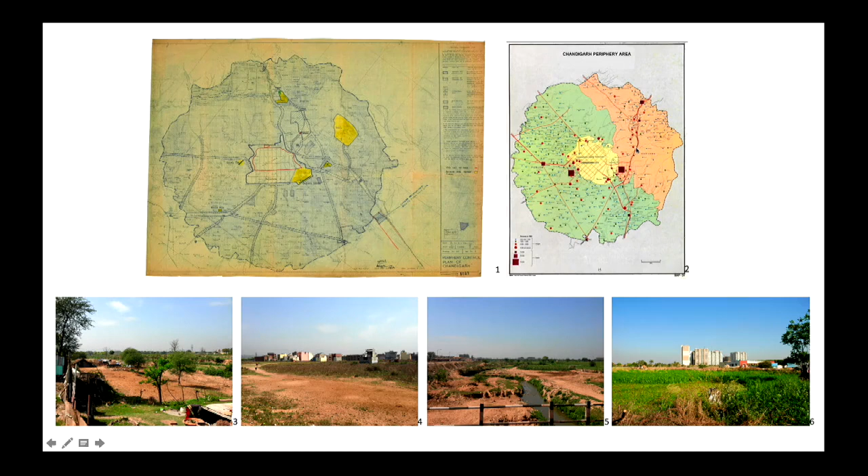After 66, this idea was difficult to maintain because of the partition in two states. You have Punjab on one side and Haryana on the other side. So today, many of those greenbelt areas are built up.

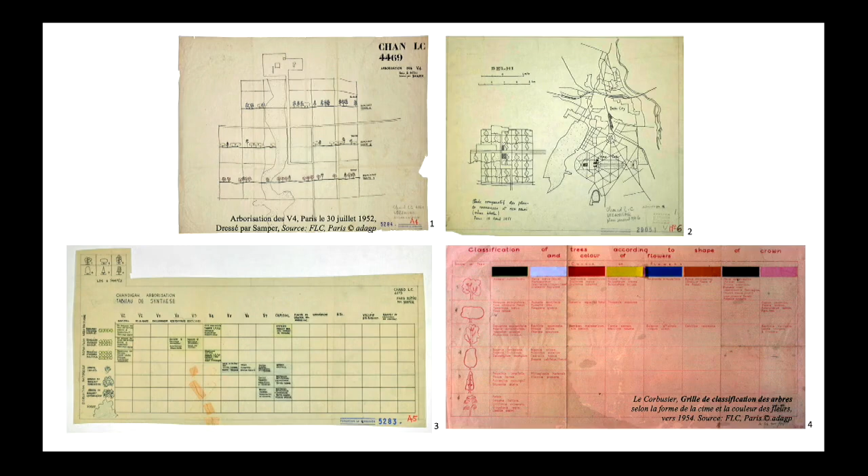Okay, so you saw the New Delhi plan by Lutyens, and in Chandigarh you see also the monumentality of the Lutyens plan. In respect to that, the project of Chandigarh is a more modest project, a very serious project on the way of planting the city. You have this kind of systematic grid of planting, which was in the last slide.

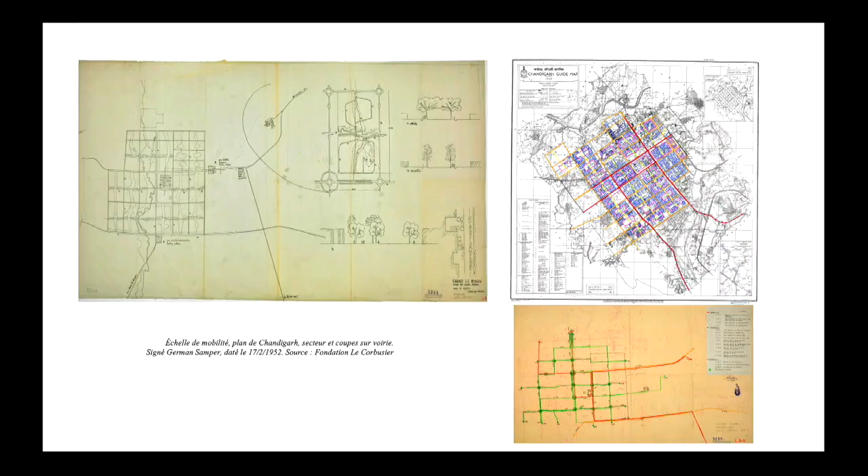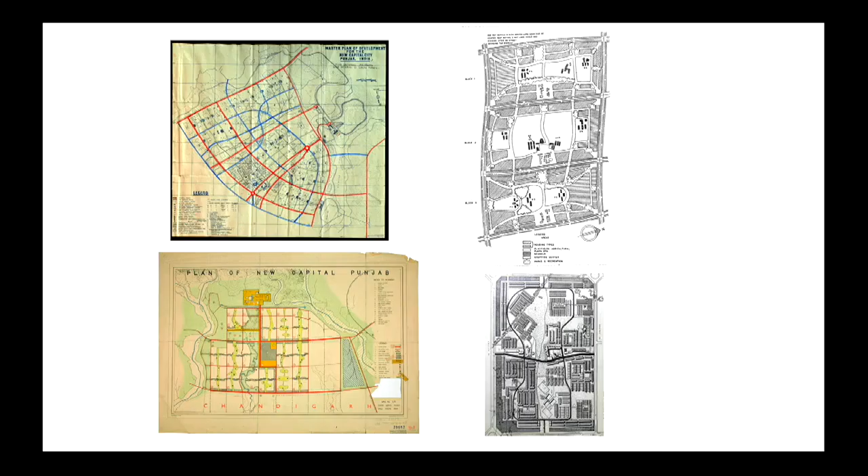Donc les vertus de la grille, on les passe, il y en a beaucoup. L'idée du village, et comment l'idée... Je voudrais revenir quand même sur celle où il y avait... celle où il y a la ligne avec les villages, le dessin de Jeanneret, etc. Ben je ne sais plus où elle est, sincèrement.

Ce qu'il faut savoir, c'est que ce qu'on peut observer n'est pas secret. Il suffit d'aller aux archives de la Fondation Le Corbusier, de lire les notes pour comprendre ce qui a pu se passer entre Le Corbusier et Jeanneret. Il y a eu des moments d'affrontement, des controverses très violentes entre Le Corbusier et Jeanneret. Une grande controverse au sujet de laquelle Le Corbusier sera toujours aigri concerne le dessin et la conception du secteur, ce fameux secteur 22 que vous avez pu visiter, qui est le secteur dit prototype et un peu canonique. Le résultat est surtout de Fry et Jeanneret, avec Drew aussi qui contribue à ce dessin.

Mais ce qu'il faut savoir, c'est juste ce petit dessin que vous pouvez voir, le secteur numéro 5. Il faut savoir que Le Corbusier déteste celui-ci, le 5. Et le 4, par contre, c'est l'esquisse qu'on a pu retrouver sur papier en tête de Jeanneret au Canada, et qui montre quel aurait pu être le projet d'un secteur tel que l'aurait souhaité Le Corbusier, c'est-à-dire un secteur composé à partir d'une somme d'unités d'habitation horizontale. Là on voit bien la façon dont Le Corbusier voyait la ville.

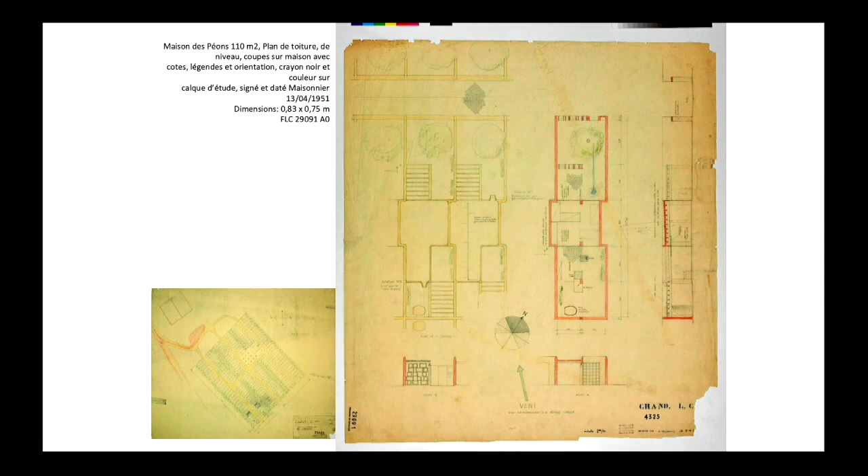Also to have all this policy on planting and knowledge - I think that's an important item. You didn't show it, but there are images on climate and how to build in a way adapted to the climate - that's an important item too. Also the building materials, brick - I imagine brick is something available in Chandigarh and around it. If you put together all those elements, that could be a smart recommendation for the government of Chandigarh. Maybe we should pay more attention to those issues in our work with the students on what we will show them. We will go to Delhi for a meeting at the end of the semester, so your presentation widens our perspective, I would say.

What do you think? Yeah?

So, urban village and climate. Just a few words, Thierry.

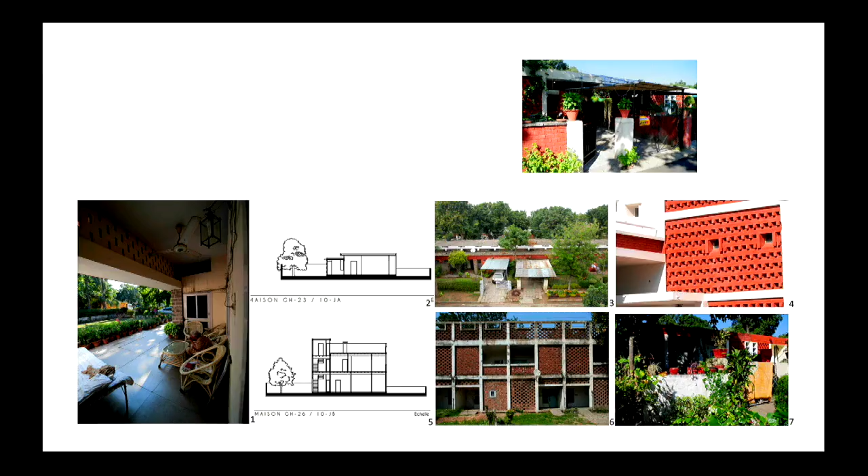Et donc là, c'est la deuxième controverse qui va opposer Le Corbusier à Jeanneret. Jeanneret, lui, vivant en Inde, expérimente les conditions climatiques parfois extrêmes et réalise que ce qui est proposé par Le Corbusier et Maisonnier n'est pas applicable.

Donc une des grandes controverses, c'est par exemple la question de la hauteur pour Le Corbusier. Si je me souviens bien du Modulor, c'est 2,26 m de haut. Donc Le Corbusier prévoit sa maison des péons à 2,26 m. Et Jeanneret lui renvoie des courriers, il lui dit: mais nous, tout ce qu'on voit, les maisons les plus agréables sont celles qui ont des grandes hauteurs de plafond, qui permettent à la chaleur de monter, etc. Et donc au bout d'un moment, le conflit est tel que Jeanneret pose sur son bureau les documents de la grille climatique et ne les ouvrira plus. Voilà, donc ça fait un deuxième drame.

So, for example, about climate, there was a second fight between Le Corbusier, who was in Paris, and Jeanneret, who lived there. Le Corbusier, of course, wanted a ceiling at 2.26 m, which doesn't work in the climate of Chandigarh or in many Indian cities. For Jeanneret, the ceiling has to be much higher, so as to have a buffer zone for the hot air to be evacuated. So this was a second fight they had.

Okay, last question. Yes, I have a question about how the city has evolved through time. Does it stay the same, or was it densified?

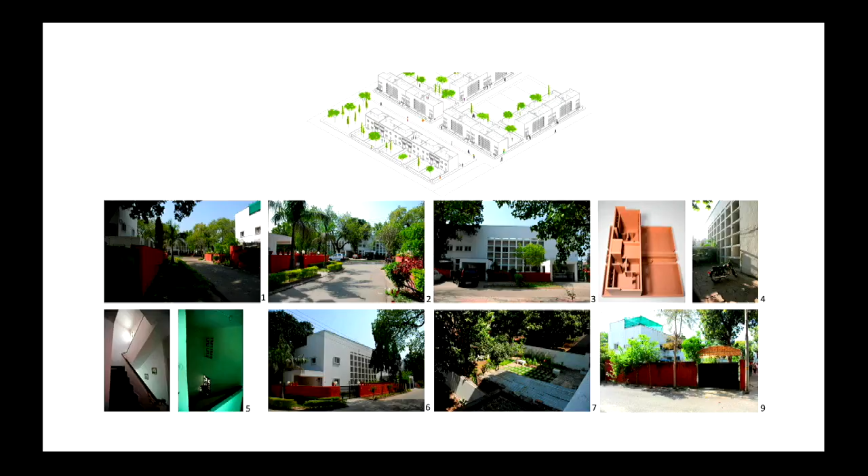Je le montre, alors il faut le trouver. Donc oui, en fait, c'était avant. Encore? Oui. Tu m'arrêtes, hein, je sais plus où c'est. Ah voilà, et alors, ouais. On peut laisser sur 45 par exemple. Yes, okay, sur Burail?

Donc ce qui est intéressant dans tout urbanisme de grille, c'est de voir comment la grille est un support d'urbanisation successive. Une des critiques qu'on peut formuler à Chandigarh, c'est que Chandigarh est géographiquement organisé socialement. Les quartiers les plus chics, les plus riches, ceux destinés aux avocats, aux grands administrateurs, ceux qui sont proches du Capitole, sont des îlots très peu denses, extrêmement verts, plantés. On a l'impression d'être je sais pas où, à Los Angeles, dans les plus beaux quartiers, etc. Et au fur et à mesure qu'on descend dans la grille, vous l'avez certainement expérimenté vous aussi, on voit que cette grille se densifie parce que les constructions sont plus modestes, les populations sont plus modestes.

Et ce qui est très intéressant, c'est de voir comment la grille assimile des villages qui pouvaient préexister, comme ce fameux village — on peut voir le dessin sur lequel vous travaillez. J'ai vu des cartographies faites sur ce village. Il y a un ancien village moghol dont on voit les tours, c'est l'ancien fort, on peut arriver à voir les tours de briques. Il y a une densité incroyable, plus de 20 000 personnes vivent à cet endroit. On a presque le double de la population de ce qu'on peut trouver dans le secteur 22, le secteur prototype.